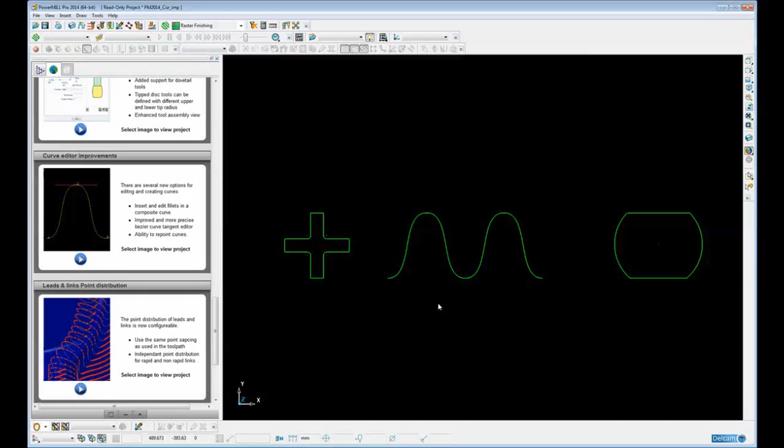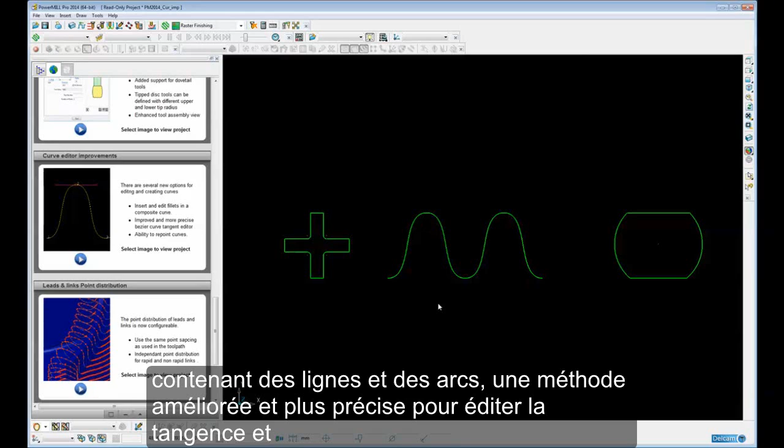There are several new options for editing and creating curves. These include the ability to quickly insert and edit multiple fillets within a composite curve containing lines and arcs, an improved and more accurate method of editing the tangency and magnitude of points within a Bezier curve, and finally the ability to repoint curves. So let's have a look at these new functions in a little bit more detail.

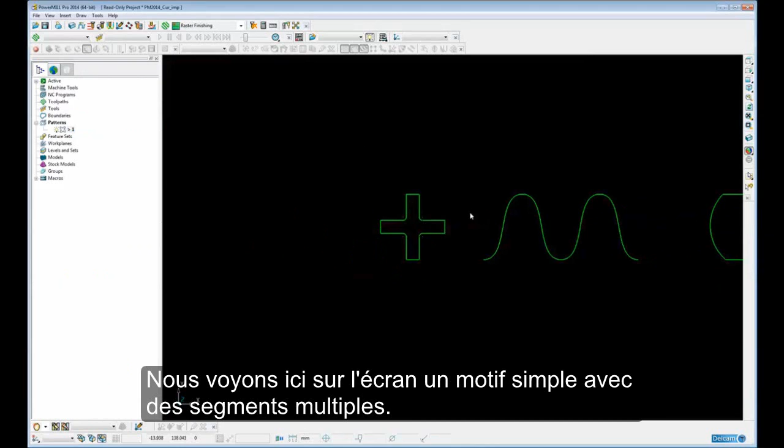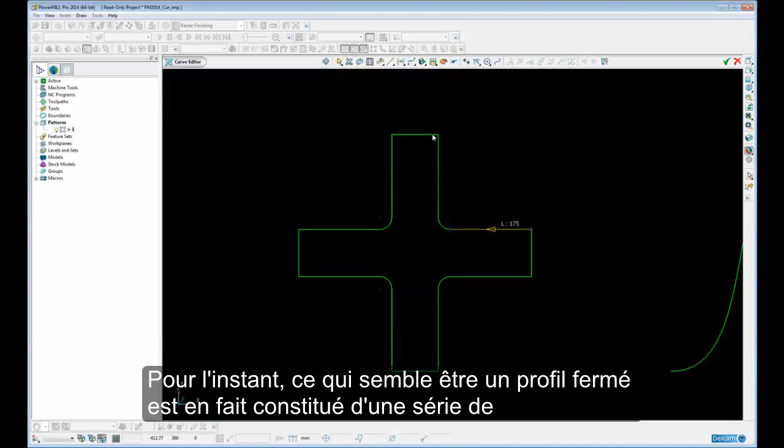So here we have on the screen a single pattern with multiple segments. So I'm going to go into the curve editor, and the first new function we're going to look at within the curve editor is the ability to insert and edit fillets within a composite curve. Now at the moment, this what appears to be a closed profile is actually made up of a series of individual lines and arcs. So before we can actually insert and edit fillets, we need to convert this into a

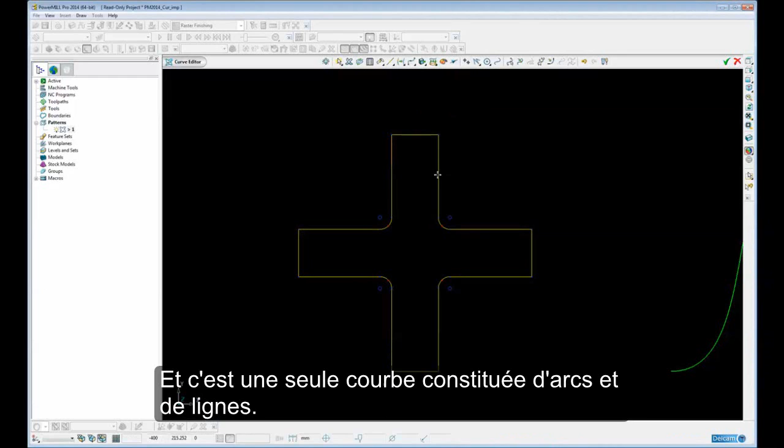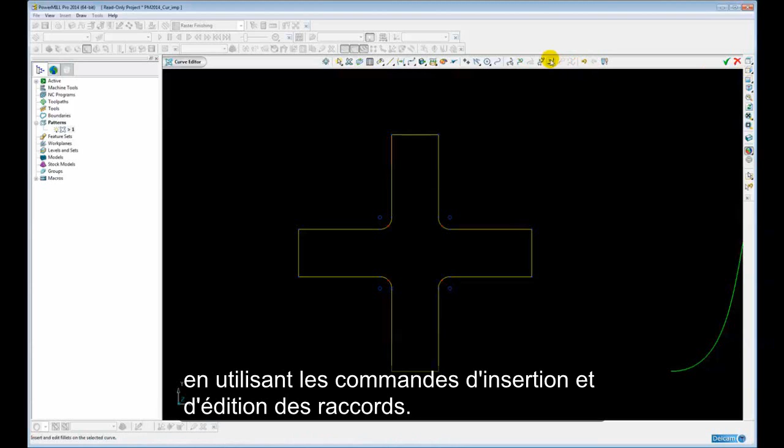composite curve. So we simply select it and merge the selected segments into a single curve, and this is a single curve made up of arcs and lines. So now when we select the curve, you can see the insert and edit fillets command becomes available. If this curve contained lines, arcs and maybe Bezier spans, then this would not be editable using the insert and edit fillets command.

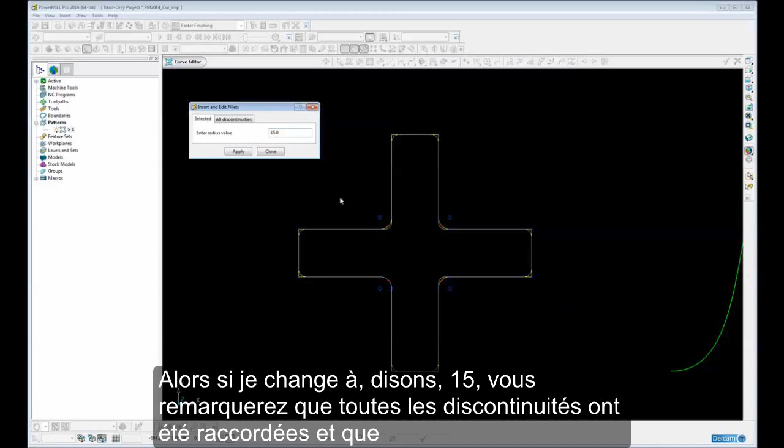But because it only contains lines and arcs, we can come into insert and edit fillets, and by default the command works on existing fillets within the profile and discontinuities. So if I change this to say 15, you will notice that all discontinuities have been filleted, plus the existing radius fillets have been modified to 15. Okay, so sharp corners and existing fillets are modified.

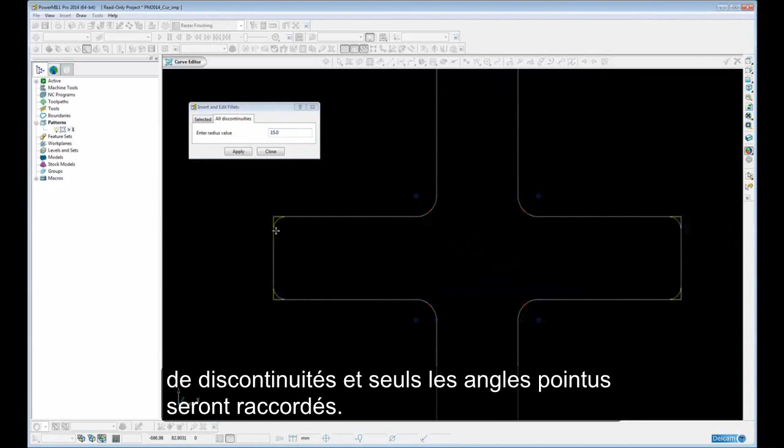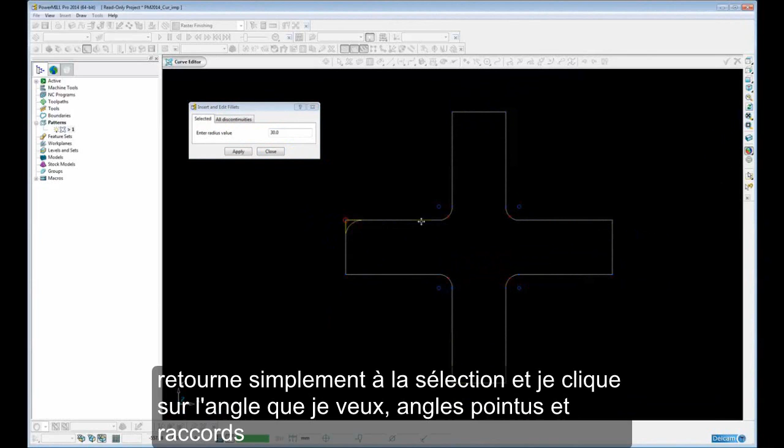If I want to keep the original radiuses within the curve, then I simply select the discontinuities option, and only the sharp corners will be filleted. Let's just change that to say 30. And finally, if I only want to choose one or two corners or one or two fillets to modify, then I simply go back to selected and just click on whichever corner I want, including sharp corners and fillets.

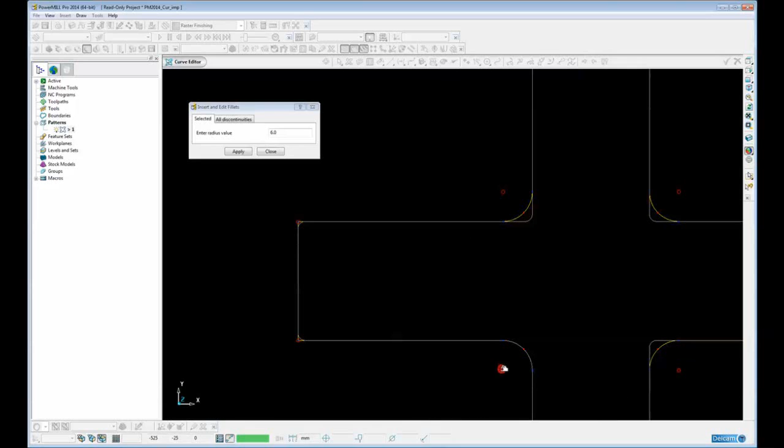Let's make that smaller so we can see it. Let's make that 6, and select this one, maybe make that 6, or that one, and I can hold down the shift key and select as many as I want, like so. Let's change that back to all discontinuities and just finish off by putting a 40mm radius, and then apply and close. Okay, so that's the first of the new functions.

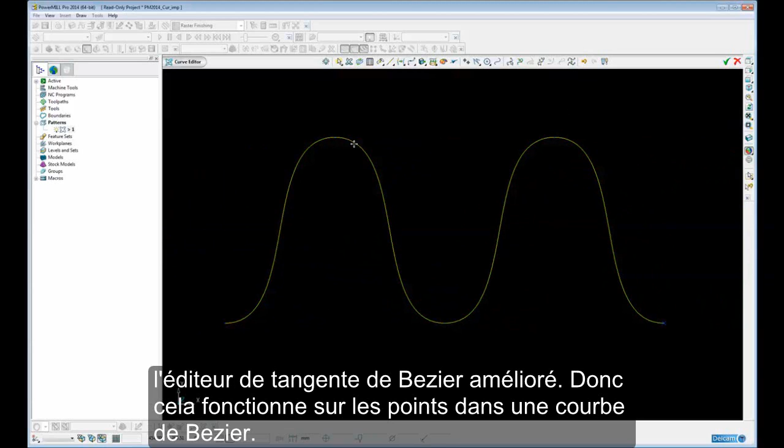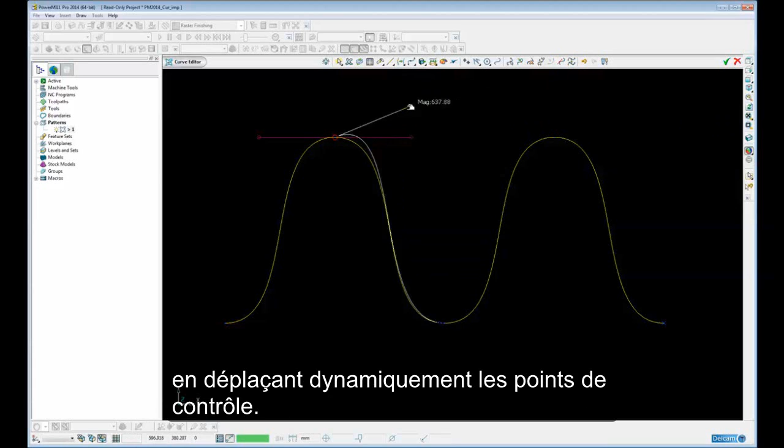The second new function within the curve editor is the improved Bezier tangent editor. So this works on the points within a Bezier curve. So if I select a point, you can see that the option becomes available, edit the tangents. In previous versions of PowerMill, we could edit the tangents by graphically dragging and dynamically moving the control points. However, this was not an accurate, precise way of editing the tangent and magnitude.

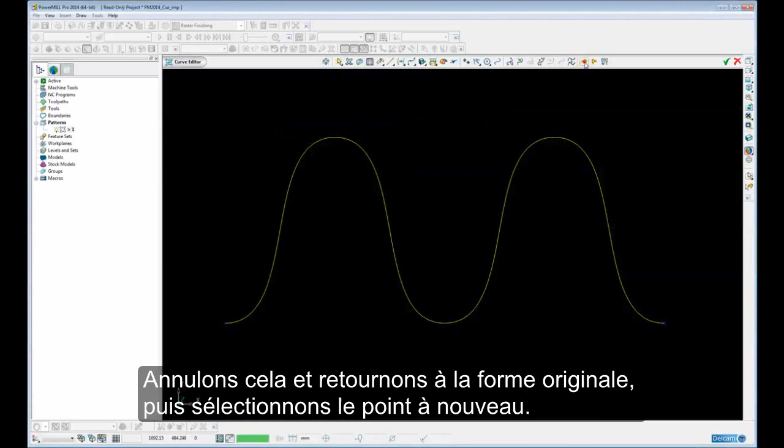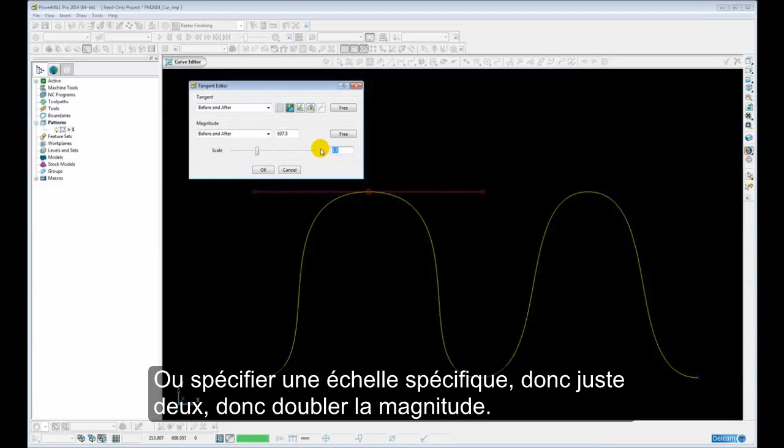So let's undo that and get back to the original shape and select the point again. Now we have a form very similar to the form that you will see in PowerShape, where we can edit the tangent before and after the point, and also the magnitude before and after the point. So for example, we can simply scale the magnitude if we wanted to, or specify a specific scale such as 2, so double the magnitude, and then we'll just set that back to 1.

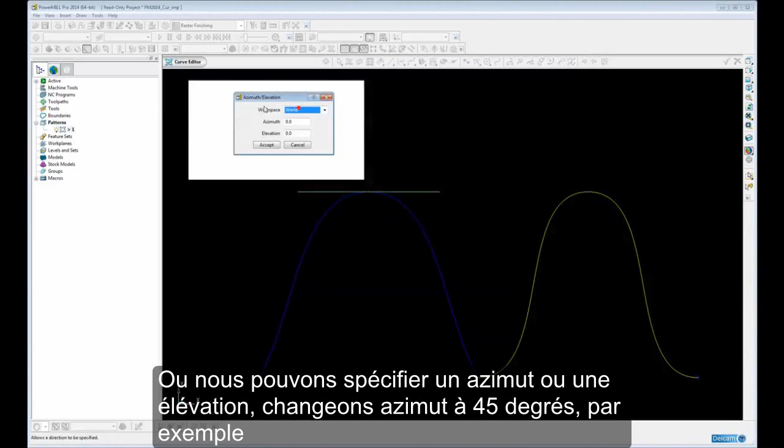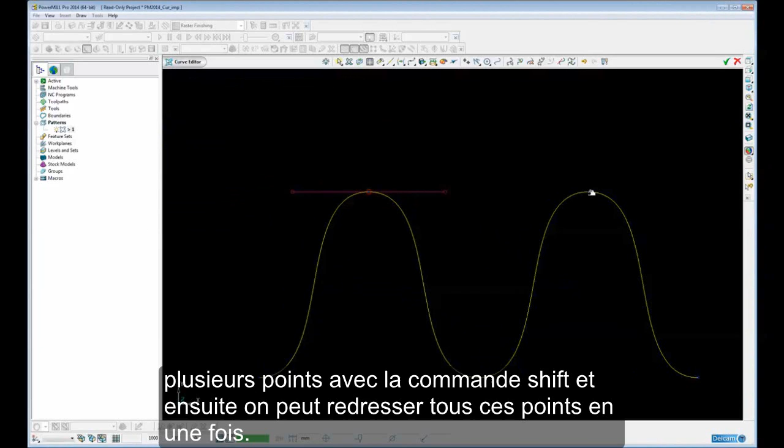Likewise with the actual tangency direction, we can use one of several options. We can straighten the tangency, for example. Let's just free that back again. Or we can specify an azimuth and elevation. Let's change the azimuth to 45 degrees. Let's just cancel that. Or even specify an IJK value based upon a workspace. If we want to do more than one point at the same time, we can do that by simply shift selecting multiple points, and then we can straighten all those points in one go. So that's the improved tangency editor.

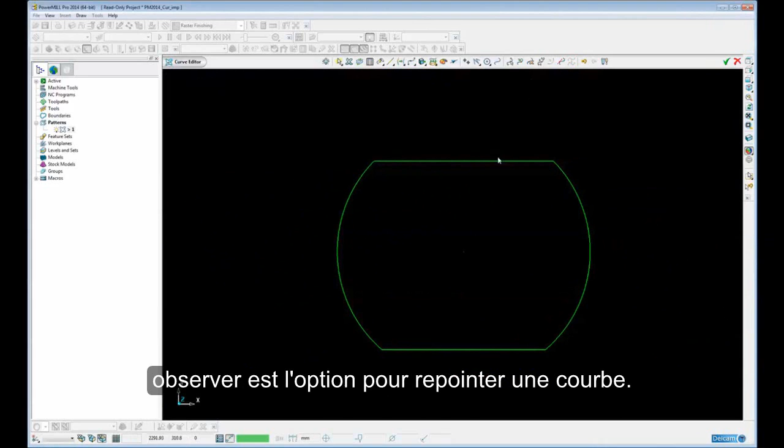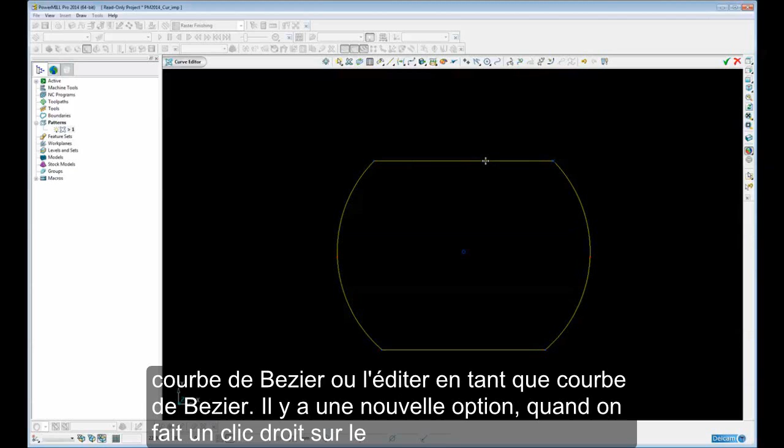The final new function within the curve editor we're going to look at is the repoint curve option. At the moment, this curve is defined as a series of lines and arcs. Now the repoint curve function only works on Bezier curves, so you can see even though I've selected the curve, the repoint curve function is greyed out. If I wanted to edit the points in this curve, I would have to convert it into a Bezier curve or edit it as a Bezier curve. There is a new option when we right click on the segment that says edit as Bezier curve. Now I have access to the repoint command.

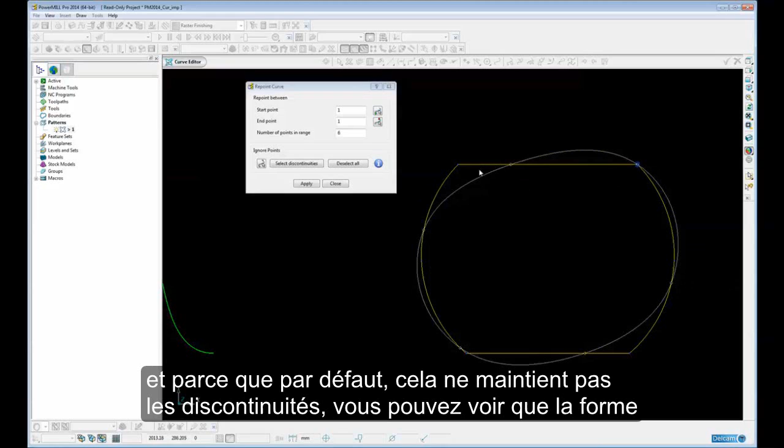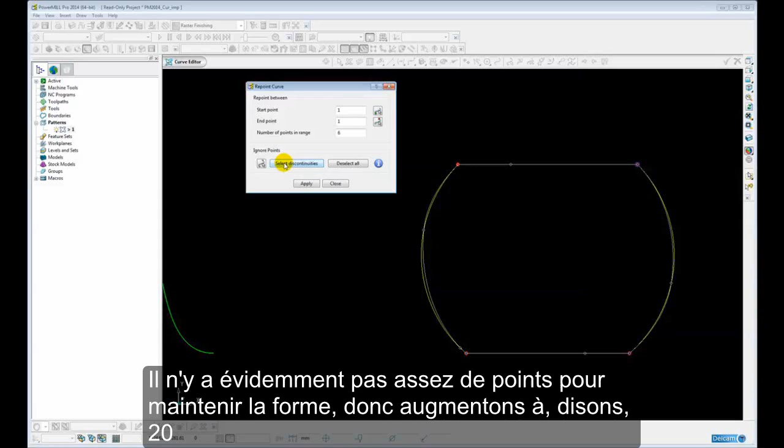So you can see the default number of points is 6, so it's actually repointed the curve to have 6 points, and because by default it doesn't maintain discontinuities, you can see the shape has changed quite dramatically. If I click on this option to select discontinuities, it will automatically find all the discontinuities and make sure those points are kept, and it will repoint in between. So obviously there's still not enough points to hold the shape, so let's increase that to say 20, and that gives me a much more accurate comparison to the original curve.

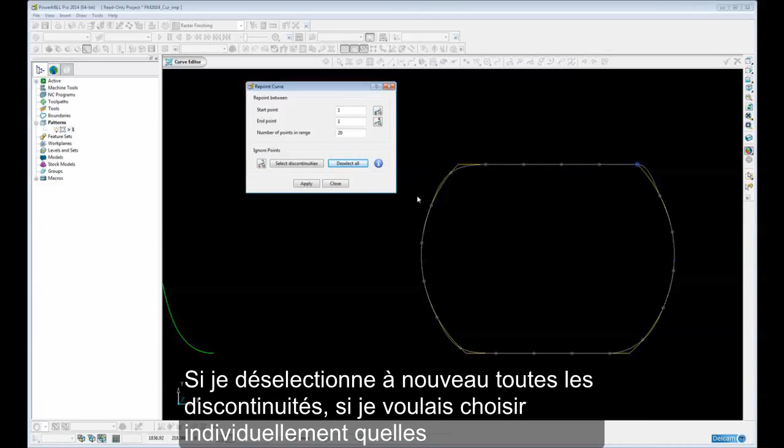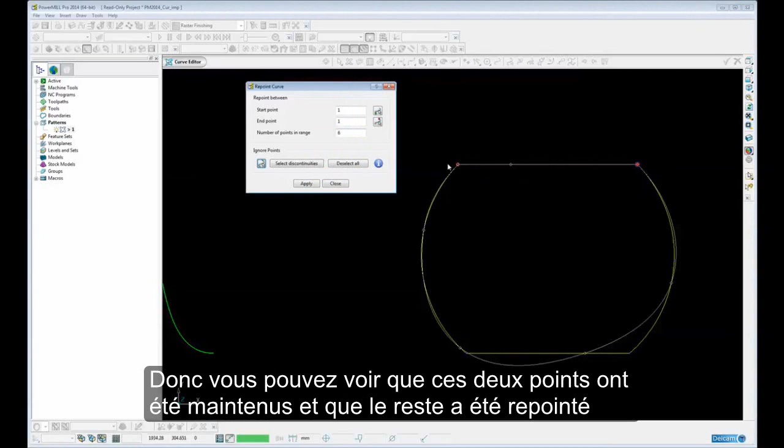If I deselect all the discontinuities again, if I wanted to, I can choose individually which discontinuities I wanted to keep simply by clicking on this icon and then holding down the shift key. I can choose maybe just those 2 points and then repoint maybe to 6 again. So you can see those 2 points have been held, and the remainder has been repointed to 6. Let's just deselect all those again.

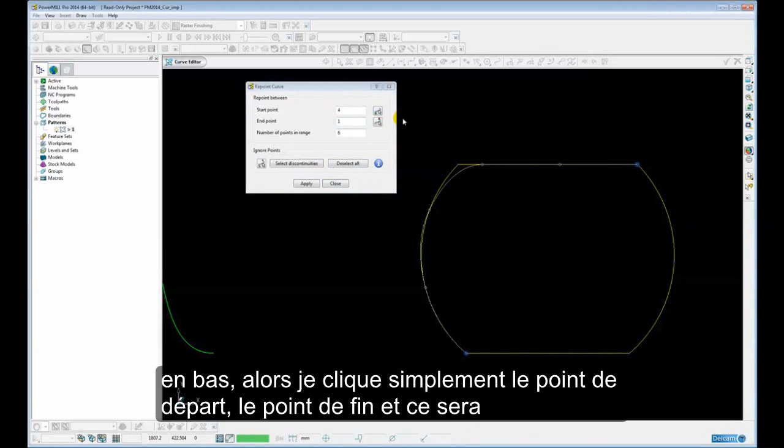I can also repoint in between 2 points. So for example, if I wanted to just repoint between this point at the top here and this one at the bottom, then I simply click the start point and click the end point, and then that will be repointed to 6. Let's make that 12, for example. Let's apply that and close and finish.